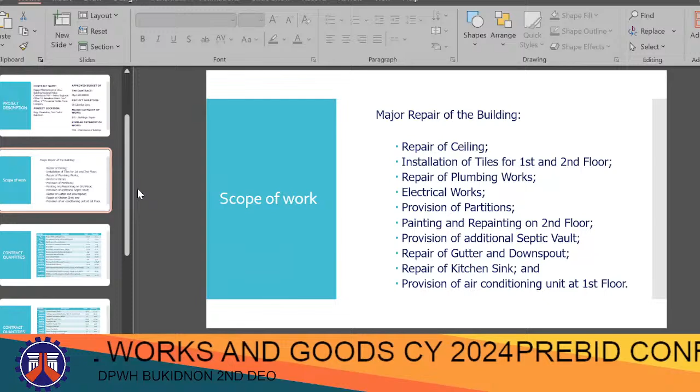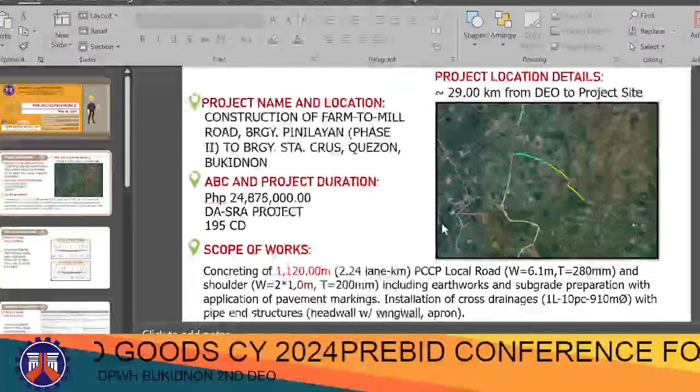So, good afternoon once again. The next project that I'm going to present is the construction of Farm to Mill Road, Barangay Pinilayan, Phase 2 to Barangay Santa Cruz, Quezon, Bukidnon.

The project is located approximately 29 kilometers from this district engineering office to the project site. The approved budget for the contract is 24,875,000, with a total project duration of 195 calendar days.

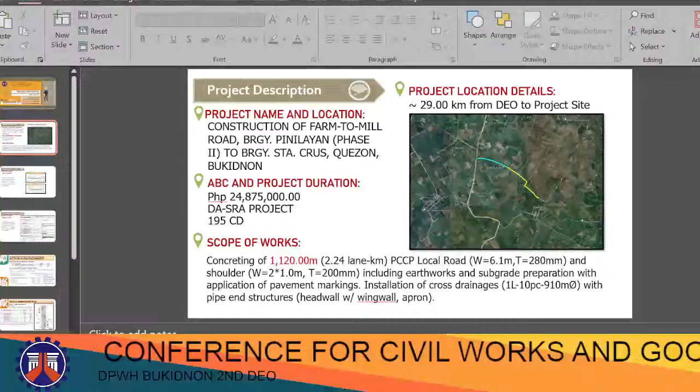So the scope of works includes concreting of 1,120 meters or 2.24 lane kilometers of PCCP road with a 6.1 meter roadway width of 280 mm thickness, and a shoulder of 1 meter width on both sides with a thickness of 200 mm.

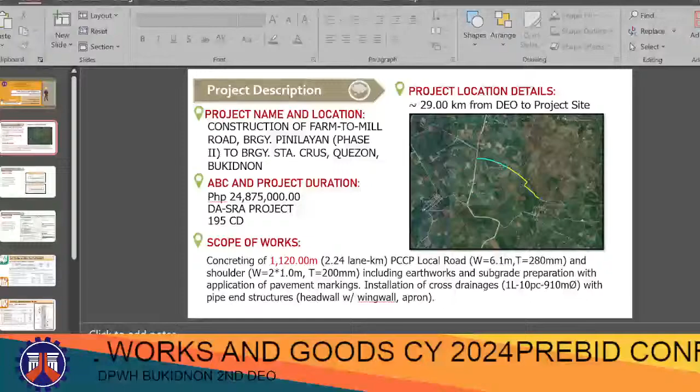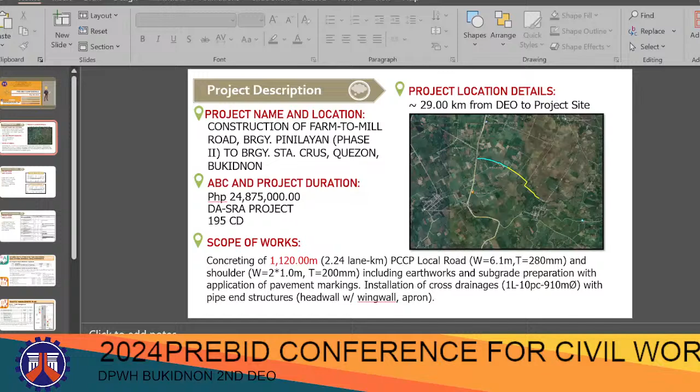It includes earthworks and subgrade preparation with application of pavement markings. We also have here installation of cross drainage, one line of 10 pieces of 910 mm diameter pipe with structures like head wall with wing wall and apron.

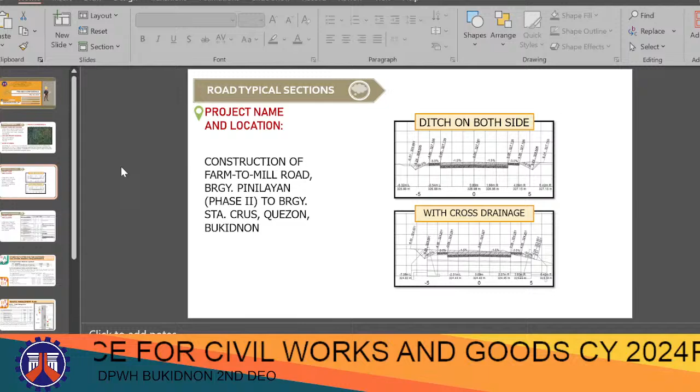So these are our typical roadway sections at our project. We have a section with ditch on both sides, and our structure is cross drainage, just a pipe culvert.

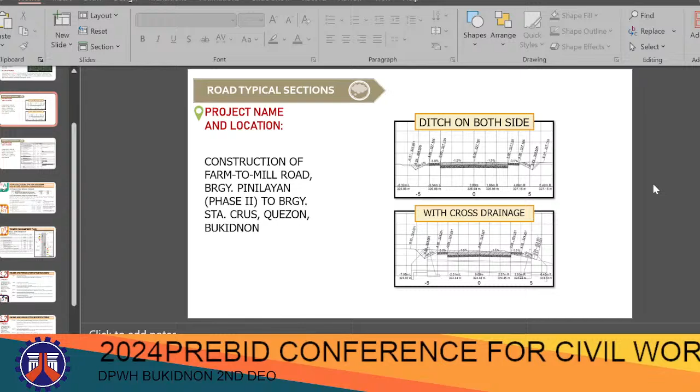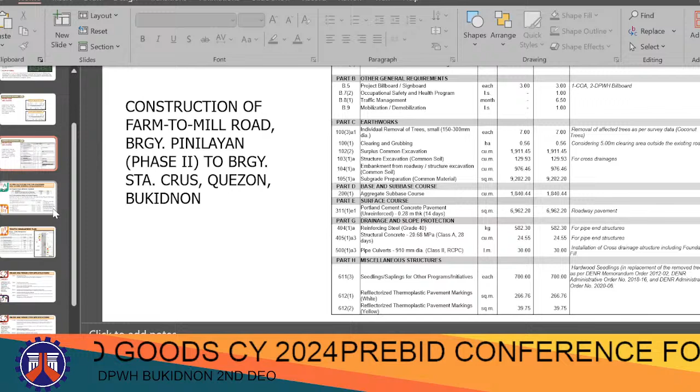Then for other provisions, we have thermoplastic pavement markings, white and yellow marks.

So for other facilities for the engineer and other general requirements, we have the program for these specifications. Descriptions include the COA billboard and DPWH billboard, two at the beginning and end. Occupational safety and health program items include labor personnel safety and practitioner, health practitioner, and PPEs.

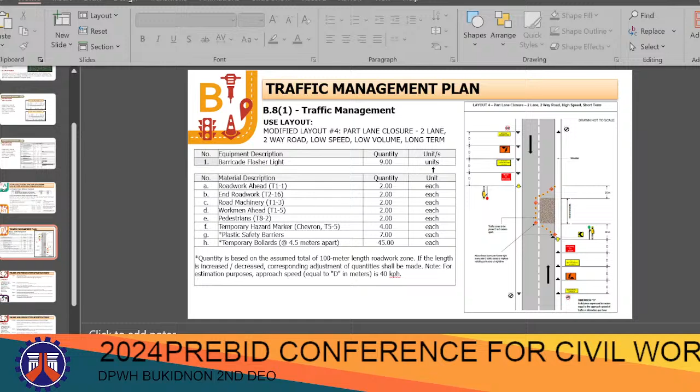Then traffic management plan, based on DO13 traffic management layout, we used modified layout number 4, partial lane closure, 2-lane two-way road, low speed, low volume, and long-term construction.

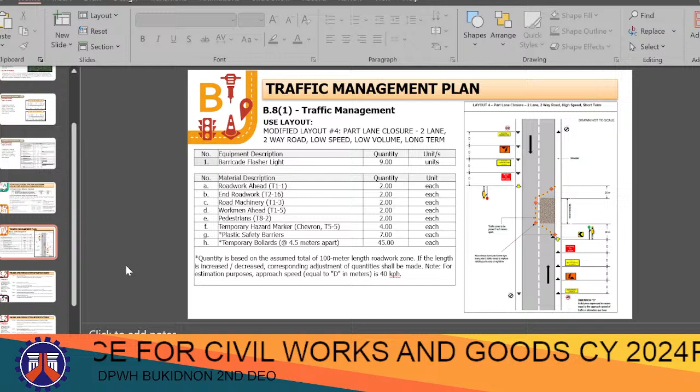Then for major and minor item specifications, we have clearing and grubbing. The quantity covers a total width of 5 meters, 2.5 meters each roadside, to cover the 10-meter clear road right-of-way limits, considering 3 kilometers away from the project disposal site.

Surplus common excavation, structure excavation for the cross drainage, embankment from roadway excavation, subgrade preparation, and aggregate base course. Quarry source is Sugod, Valencia, Bukidnon, considering a hauling distance of approximately 44 kilometers from material source to project location.

Then our PCCP, we have 280mm thick. The quantity indicated is for paving of carriageway and curb widening at specified locations, and we used ready-mix concrete. We used a mechanized joint sealer machine for sealing the construction joints. The hauling distance considered is 44 kilometers away.

And reinforcing steel grade 40 for all the reinforced concrete structures. Structural concrete class A for the headwalls, wing walls, and apron. Pipe culverts class 2, RCPC 910mm diameter, for the cross drainage.

And lastly, for the pavement markings, white and yellow marks. White marks are for the road edges and broken white center lines on straight lines. Yellow marks are for the horizontal curve lines in the alignment. So that would be all for the FMR Phase 2.

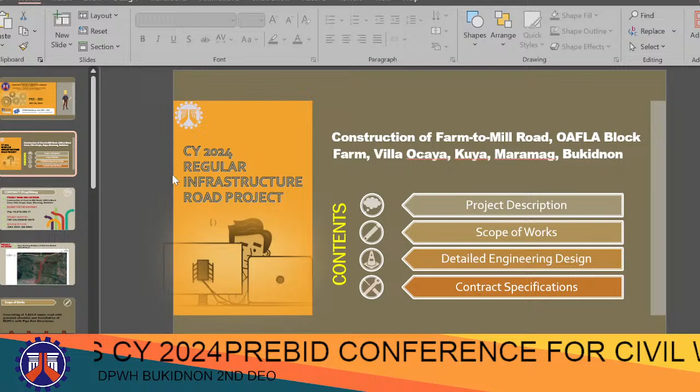Good afternoon, everyone. For our next project, we have construction of Farm to Mill Road of OAFLA Block Farm, Villa Ocaya, Kuya, Maramag, Bukidnon. Contract ID 24KB0119. Project name and location: construction of Farm to Mill Road of OAFLA Block Farm, Villa Ocaya, Kuya, Maramag, Bukidnon. Approved budget for the contract,

19,978,468.17 pesos. Project duration 180 calendar days. Source of fund: GAA 2024 DA SRA.

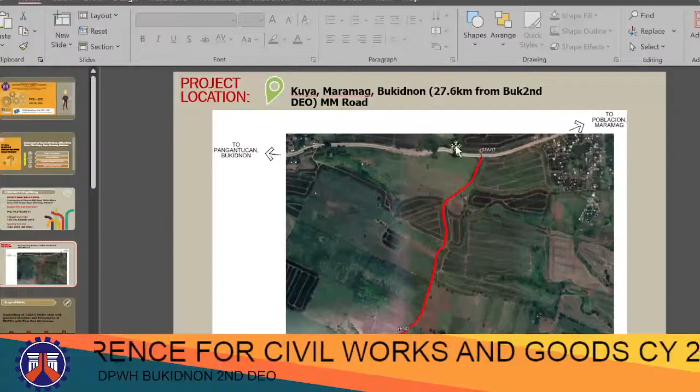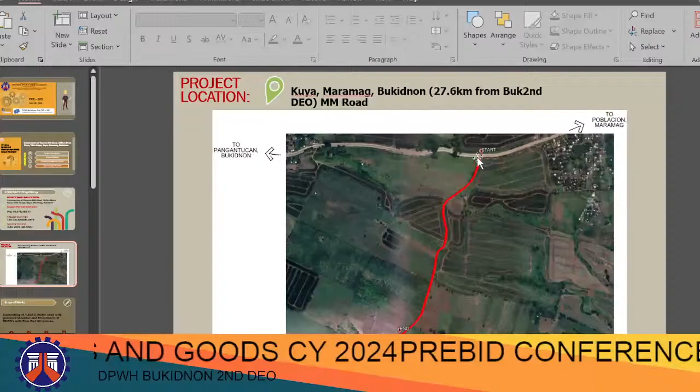So our project location, you can see here the road. On this side heading to Poblacion Maramag, then on the left side toward Pangantucan, Bukidnon. So our project beginning is at this junction, which is 27.6 kilometers from our office.

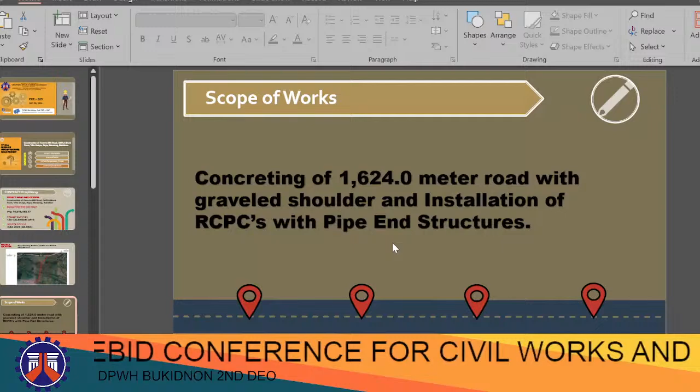Scope of works: concreting of 1,624 meters of road with gravel shoulder and installation of RCPCs with pipe end structures. So these are the geotagged photos.

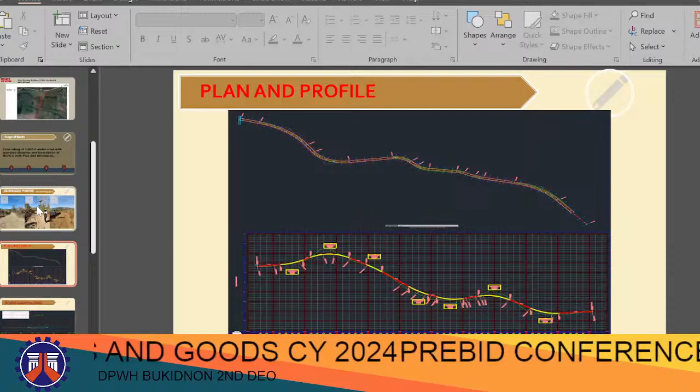So for our summary of quantities, we have facilities for the engineer, construction of field office for the engineer, other general requirements, project billboard or signboard, occupational safety and health program, traffic management, mobilization or demobilization. For our earthworks, we have individual removal of trees, small 150 to 300 millimeter diameter, surplus common excavation, structure excavation, pipe culvert and drain excavation, embankment from roadway structure excavation, subgrade preparation.

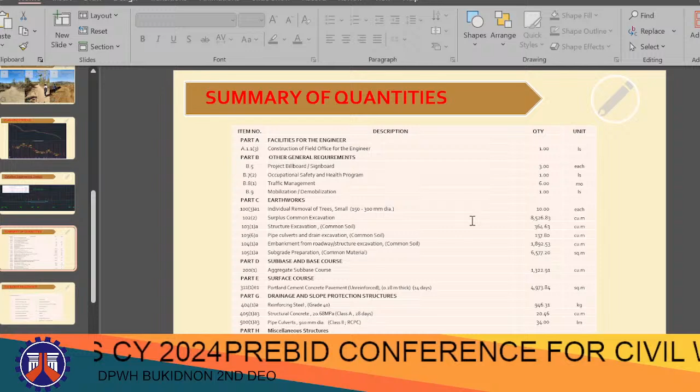For our subbase and base course, we have aggregate subbase course, surface course, Portland cement concrete pavement, and for our drainage and slope protections, we have reinforcing steel, structural concrete, and pipe culverts 910 millimeter diameter. And for our miscellaneous structure, we have seedlings or saplings for the other program or initiatives.

For our next project, we have construction of Farm to Mill Road, Tos J Block Farm, Sarayon Hills, Kuya, Maramag, Bukidnon. Approved budget for the contract is 8,562,200.65 pesos. Project duration is 120 calendar days. Source of fund is GAA 2024 DA SRA. This project location is approximately 29.10 kilometers away from our office.

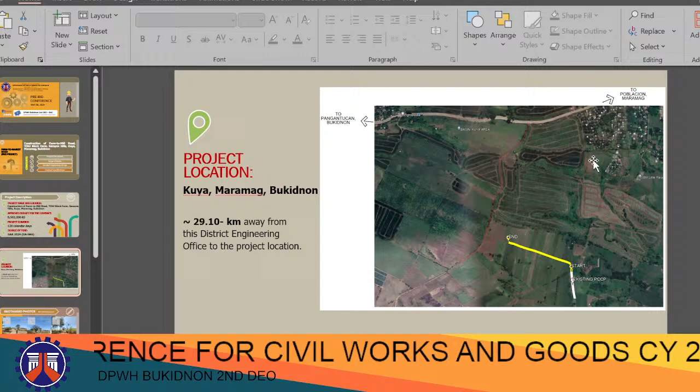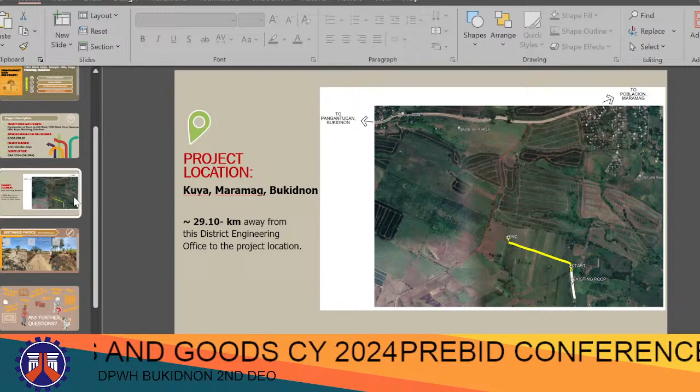Excuse me, how much is the approved ABC? 8,562,200.65. The approved budget of the contract as stated in the notice of the bid meeting is... 29,700,000... 8,562,200.65 pesos. Okay, you continue.

These are the geotag photos for this project.

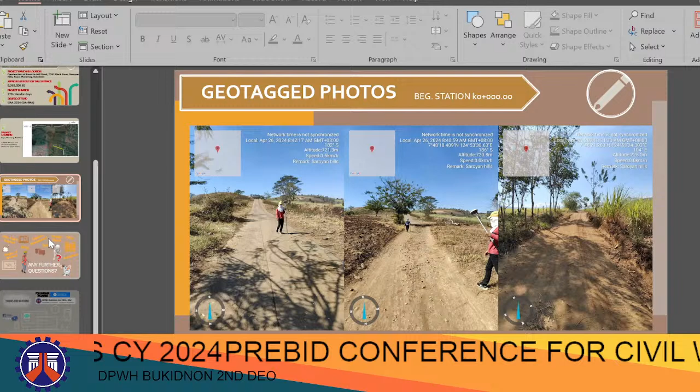So for these projects, there will be a bid bulletin issued, sir, to submit the corrections as per plan, the changes. So that will be all for the Kuya FMR projects.

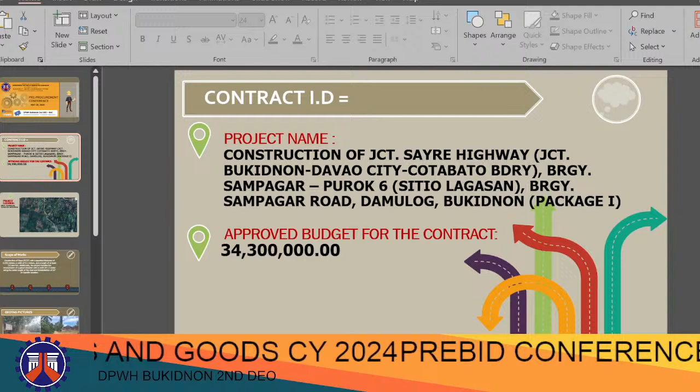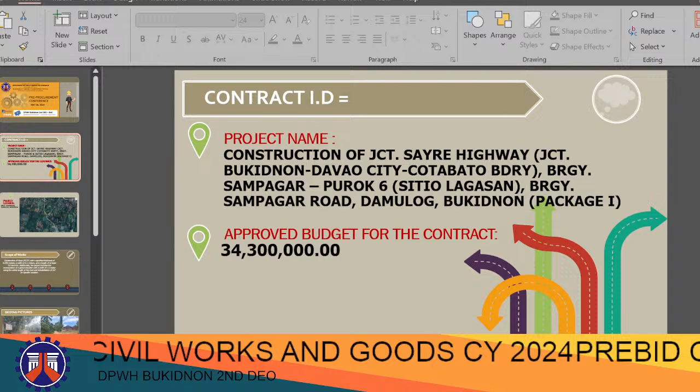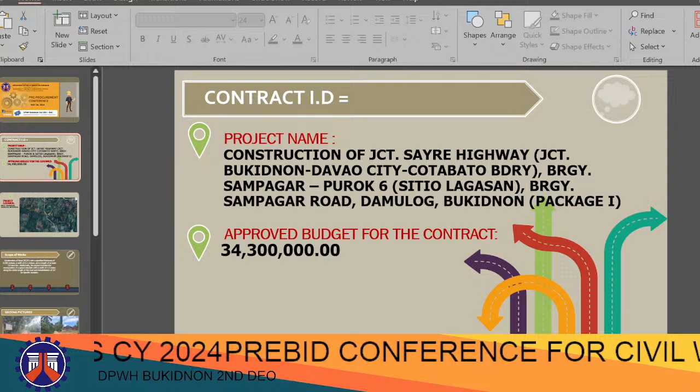Yes, ma'am, so from the beginning, ma'am, it's 1.5 kilometers, but we skipped the existing concreting, we didn't touch it. So, any questions?

Next project. Where's the exit?

So the next project is 24 KB 0197, under SRA project, construction of Farm to Mill Road, Barangay San Jose Phase 3 to Wadi, Quezon, Bukidnon. Sorry, it's 198, project number 3, 24 KB 0198. The approved budget for the contract is 17,412,500.